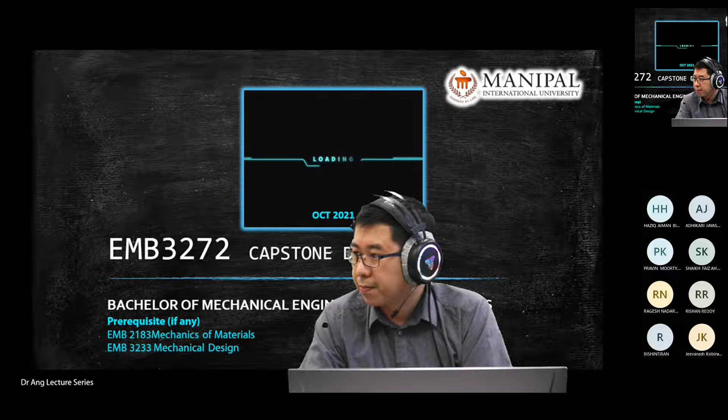All right, now in the previous class I debriefed you on the general information about this Capstone Design 1. Make sure you already passed these two modules, right? You need Mechanics of Materials and Mechanical Design. Just to recap, Capstone Design 1

will continue in the next semester as Capstone Design 2. At this stage, we're focusing on your design. You come up with a design by end of the semester, and then you materialize it or fabricate it in Capstone Design 2.

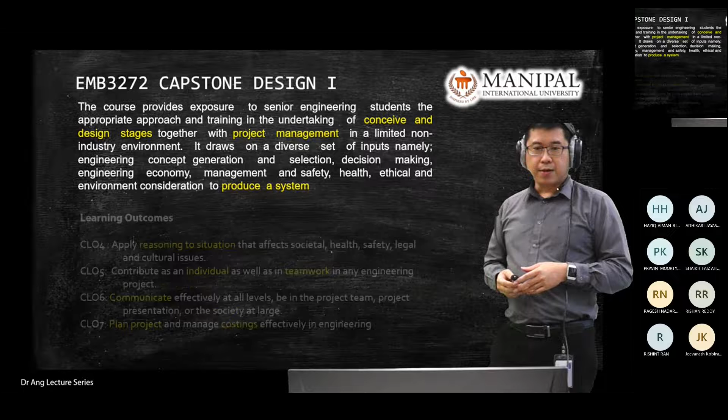Now I will give you a topic for this module. You have 100% coursework, with individual presentation, group presentation, and so on. You have a project report, and by the end of the semester you need to submit a report worth 40%.

What I'm trying to do here is break this 40% into phases. For example, first week you submit one part, second week a separate document, so you don't need to rush for the final report at the end of week 13 or 14.

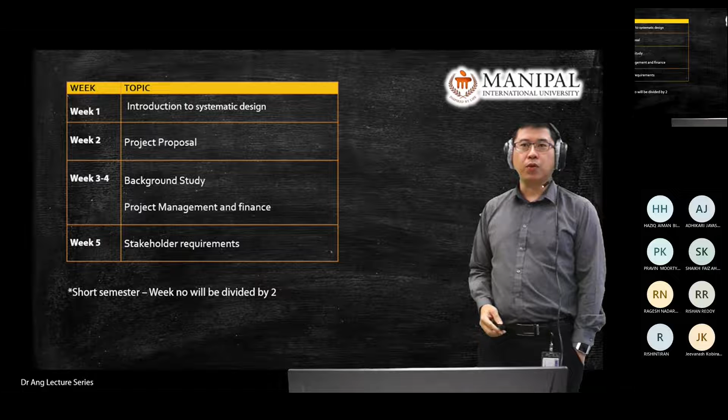I'll give you some idea for the project proposal after the holiday, and then you can start generating your design. Since we'll be doing it in a group, I will group a maximum of 2 persons in one group.

Not me, but you choose your partner. 2 persons in one group. Then we see how it goes - if we have an odd number, then maybe I will allow 3 maximum. It depends on the situation we have.

Once our class stabilizes, for the moment try to find one partner for this module. You need 2 individuals in one group for the projects.

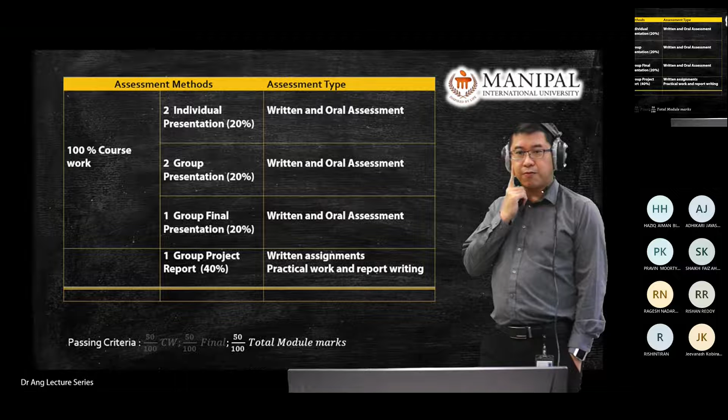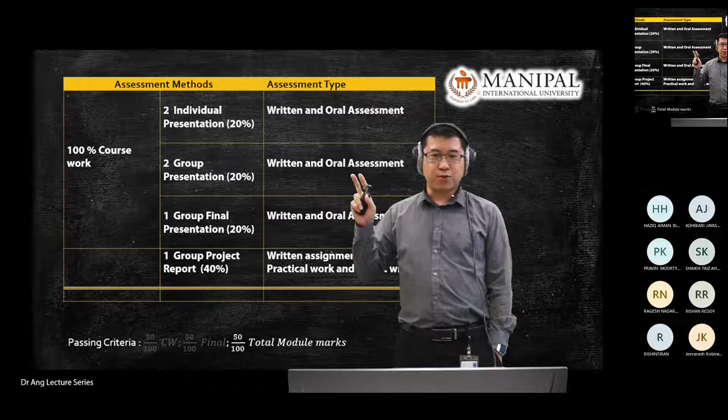I will give you time, and you can start thinking of some idea. You can discuss with your partner, and again, your partner is going to stay along with you together into Capstone 2. So choose your partner carefully - 2 persons in one group, and the 2 of you will stick together from Capstone 1 into Capstone 2. Choose your partner wisely.

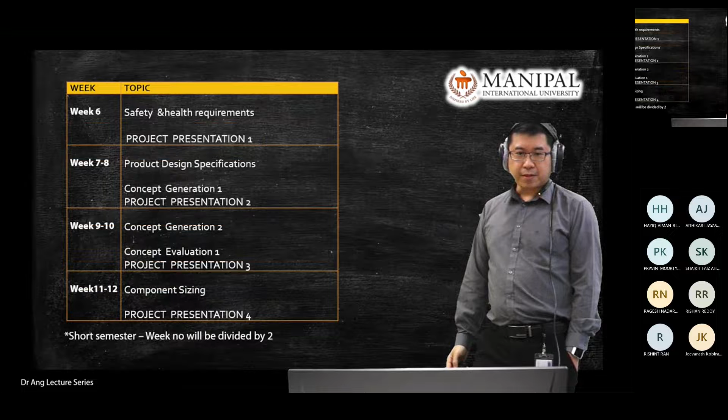Okay, let's do a little bit of lecture today, a short lecture. These are all the references. Don't worry about the PowerPoint slides, I will share with you later.

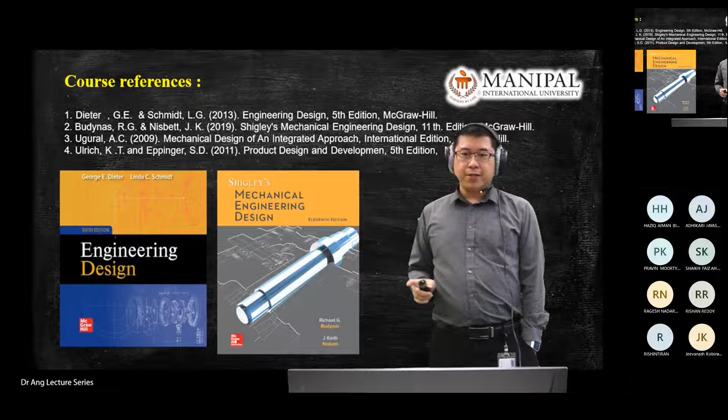So we go into chapter 1: what is a systematic design? I'll be using this book. It's a bit old, but I think published in 2015, 2016, right?

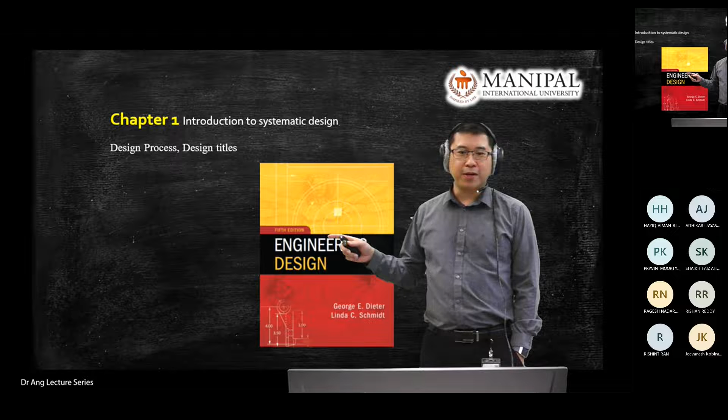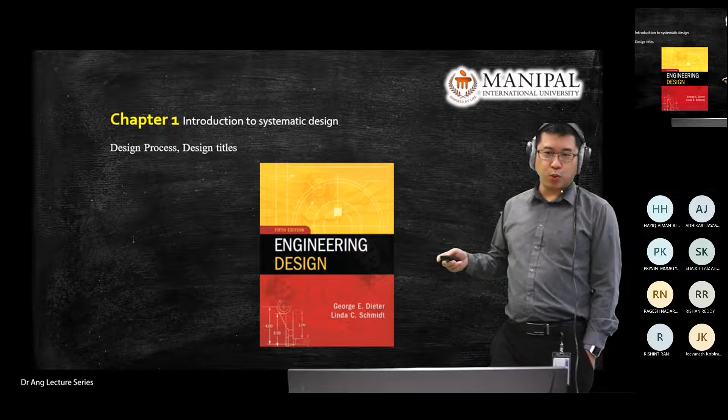The reason I took this book is because of the colorful photos inside. The latest version I have doesn't have color, so it appears less interesting when we talk about the topic. So I chose this older book instead, but if you have a more latest version, feel welcome to use it - it's the same information, only the photos in this version are more colorful.

Both textbooks are by the same author - one is the latest version I have, and this one is the older version, but I prefer the photos inside this book. The concept is still the same inside there.

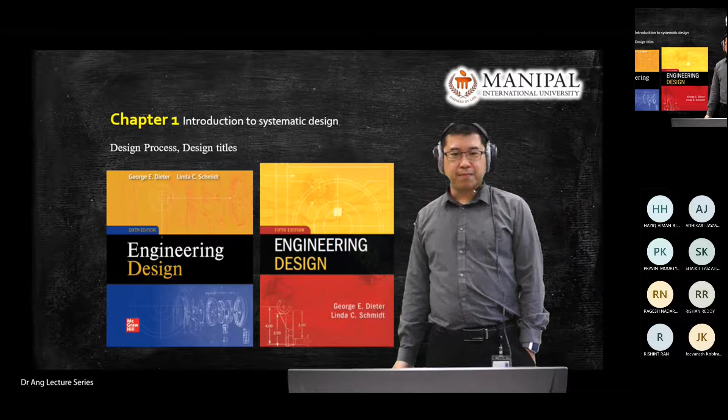So let's look at a few definitions about design. Since we're talking about Capstone Design 1, you're going to focus on design. So what is the definition of design? Design is to put something together, to generate something new - you put all the components together to generate something new, to generate new devices or a new function, or a new way to address the customer need or the society's needs.

So after this lecture, you can go find your friend to become a group member. Then both of you can start discussing about what you want to do in these projects, what you want to design, what machine you want to design. Try to think about that.

Now basically, if you ask me, I would like to propose that in our class, when it comes to Capstone 2, I want to showcase your design and invite you to an international competition. Meaning for Capstone 1, you've spent more time on the design, but when it comes to Capstone 2 next semester, you will still come into my class.

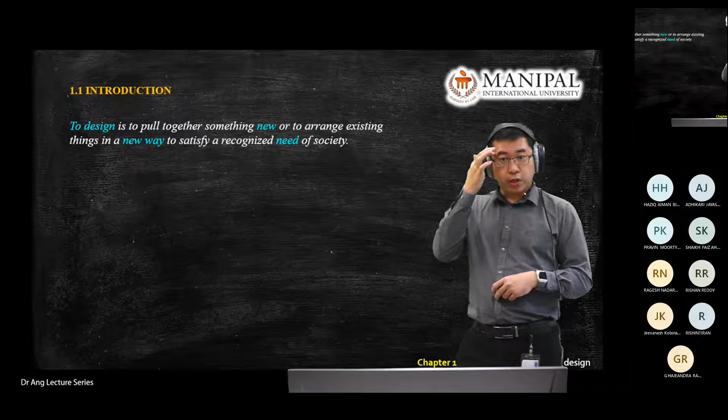Even if your product is so good, it might come out in the news and you might even come out in the magazine. So I would invite you to pay more attention when it comes to your design. Don't cincai. In Malaysia we use the word cincai, meaning you just simply do it for this module.

That kind of attitude doesn't work in this module. So don't give me things that have low quality. I might ask you to redo until you reach a very high quality product.

Even for your products, I will invite maybe top management, VC, or industry experts to come and look at your design. So that is what I plan for our class.

Have that mental preparedness for Capstone Design 1 and even for Capstone Design 2, so that you can see what you need to prepare for the future. So just get prepared for it.

So again, what is design? Design means you use the existing idea, existing component, or existing engineering products, and you assemble them to produce a new function, or a new way or method to satisfy a current society problem.

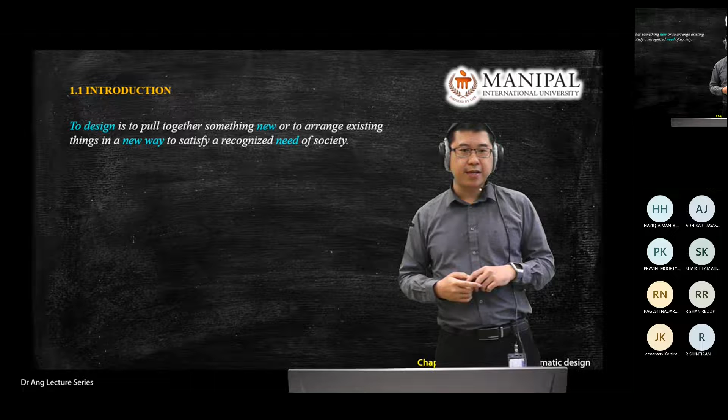I'm still checking the funding for these projects. If there is no funding from the university, however, if your project is related to drone delivery, the funding might come up from my personal account.

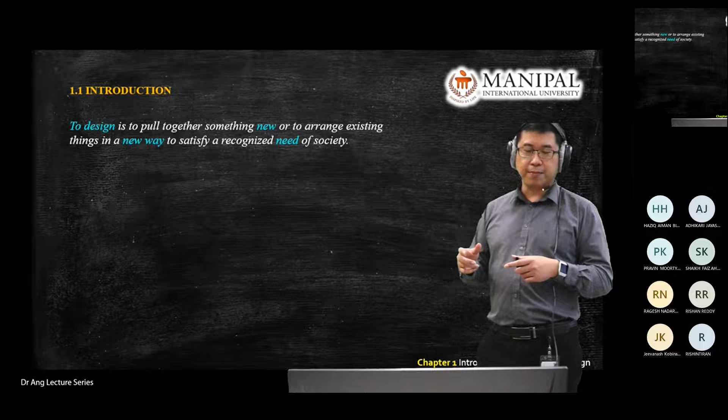So I might fund your idea, or I will invite you to the research group, and we will look at your idea and fund the expenses of, for example, when it comes to Capstone number 2, if your idea was so good and you need to fabricate it, then I will invite you to be part of my research team, and we will fund all the expenses.

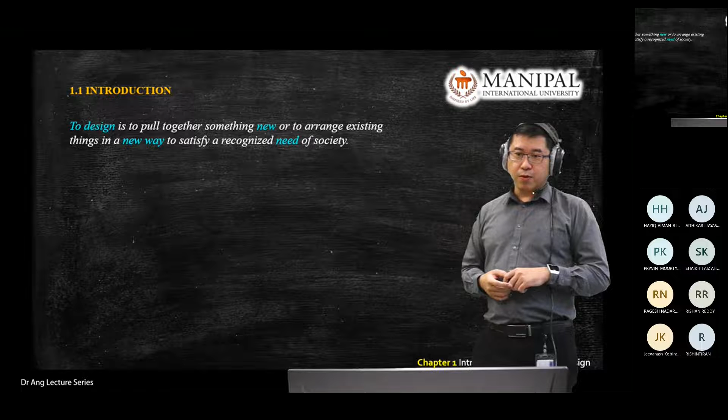When you need to buy things, buy components for the project, the funding will be from me. So that is my proposal, that is my suggestion to you. Of course, for this capstone design, if you have other ideas, I'm still open to you. It depends on the discussion with your partner later on.

By the end of this semester, for this module, you need to come up with a design of your project. And then next semester, when it comes to Capstone number 2, you need to fabricate it and showcase your products.

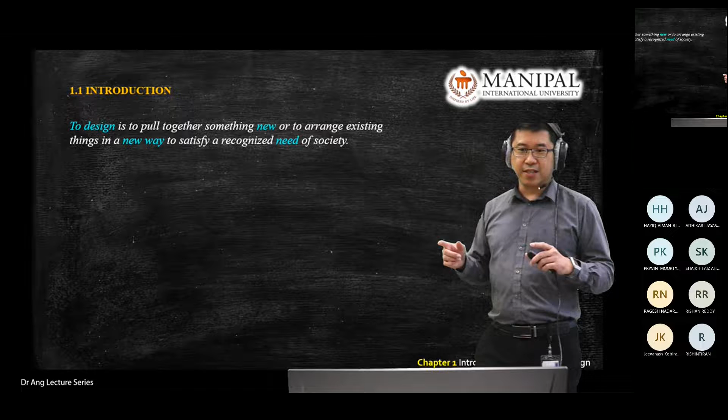And again, I'll bring you to the international competition if your design is so good. So that will be the direction of Capstone 1 and Capstone 2 in my class.

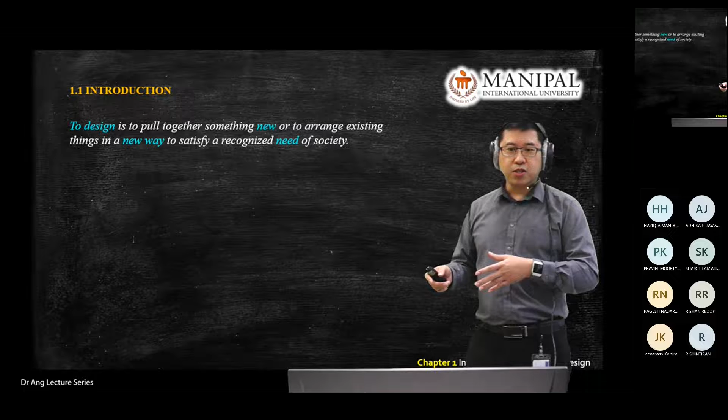In fact, you don't get the opportunity to go into international competition if you compare to other universities' programs. So in my class, I want you to open your eyes to how people do when they come to international competition. In fact, I was invited as a judge in some of the international invention competitions.

So I would like you to experience the same excitement when you can showcase your products to the public in the conference, in the international competition.

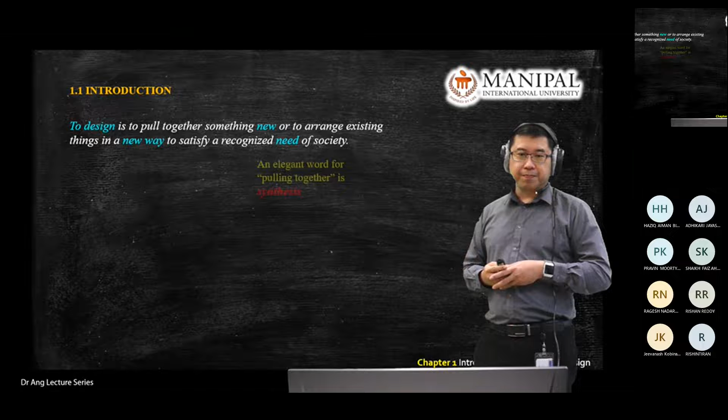One technical word that you will see frequently when it comes to design is synthesis. This word might sound bombastic or advanced or complicated, but when people talk about synthesis, it just means put together. Okay, it just means you put things together.

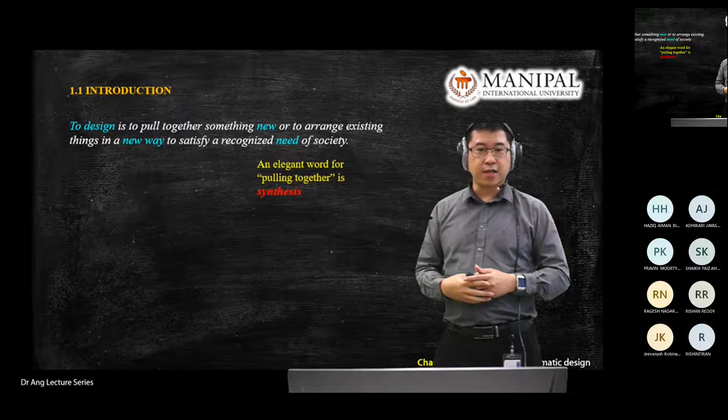You will hear the word synthesis a lot in an international conference where the inventor presents their idea. This is a very popular word they use.

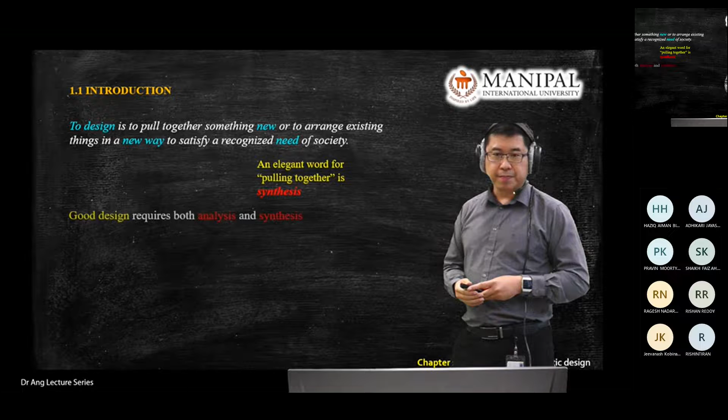What do we mean by good design? How do we evaluate your design by the end of semester? How do you score high marks? It involves two things.

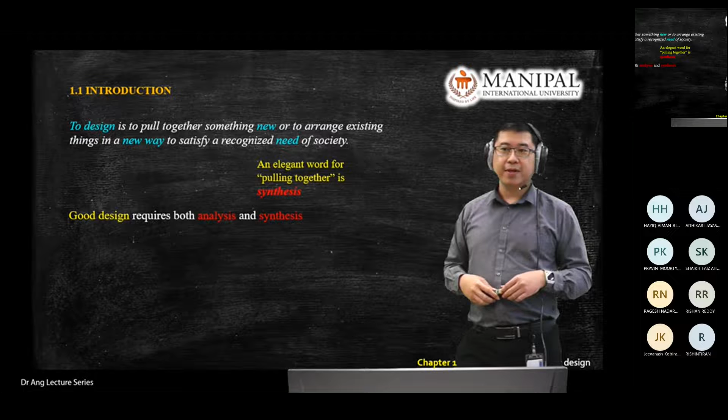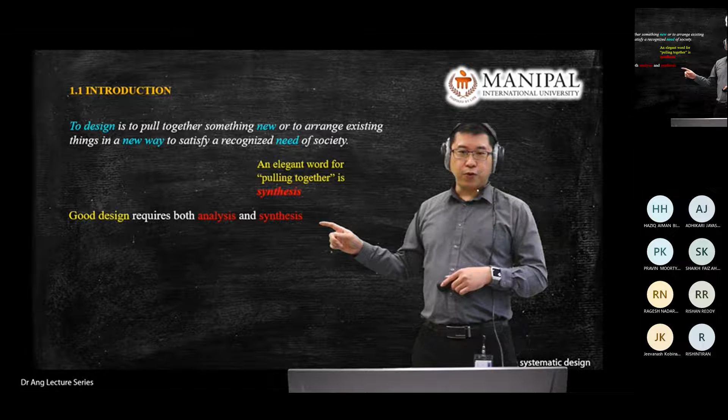One, we look at whether you are using solid engineering concepts or principles to produce the products. Is there any engineering principle or equation that you use for the design? There will be some calculation you need to show us by the end of the semester for your design. Show us what you learn.

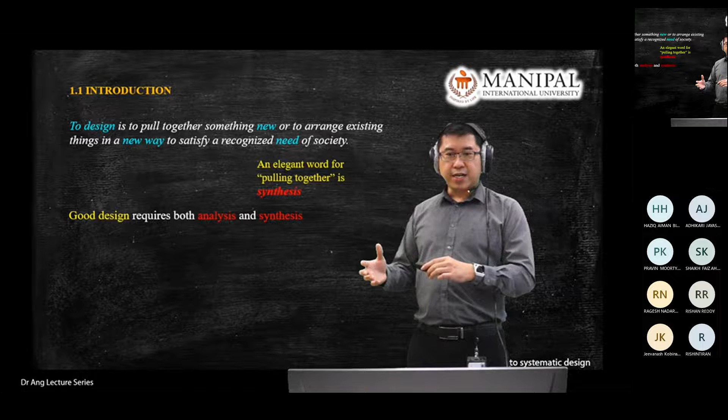Then synthesis means you're able to put things together to generate products that deliver the needs of the customer or the needs of the society.

So this is just a textbook explanation. Analysis means you're able to do analysis, able to predict the behavior. Maybe using equations, you're able to predict the behavior. You learn, I'm not sure whether you learned before, how to calculate the life cycle of products, like the life cycle of a screw - when you have a rotation, how many times it can last if you use this material, and so on.

And then nowadays we have all the modern technology, modern simulations. In Manipal we have AutoCAD, we have CATIA, even SolidWorks, right? So you can use all these tools to do analysis and generate a good report.

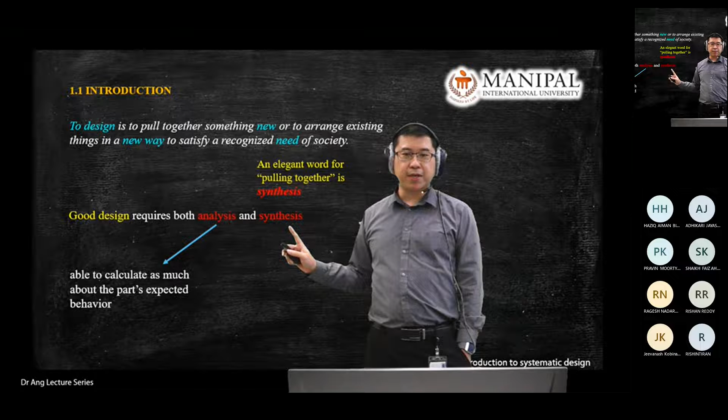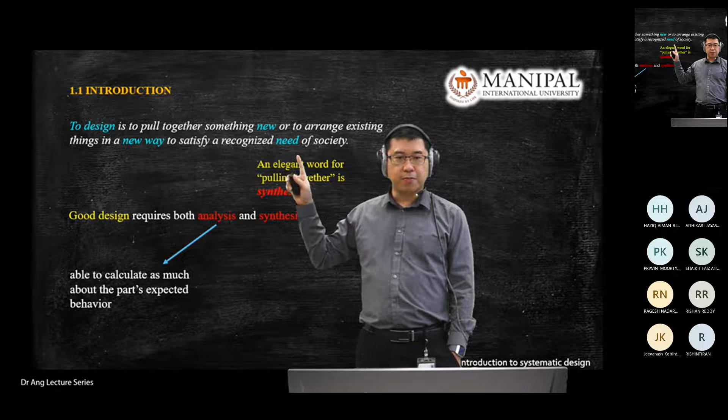Synthesis means you put all the parts together. You learn in your technical drawing that you have exploded view, assembly view, assembly parts and all that. These are the process for a good design. So when you put things together, does it work? Does it meet the objective, or does it meet the needs of the end user? Okay, these are the things.

The first C is creativity. If you want to do design, you cannot run away from creativity, you cannot run away from complexity, you cannot run away from choice, you cannot run away from compromise. So when you do design, it means you do according to the definition just now. What do you mean by design? Design means you put things together to generate a new function or a new idea to meet the needs of your customer or the needs of the society.

So creativity is also related to the word new, where you create something, right? You create something, similar to synthesis, but creativity means you create something new that doesn't exist before. And during the design process, you will come across lots of decisions to make.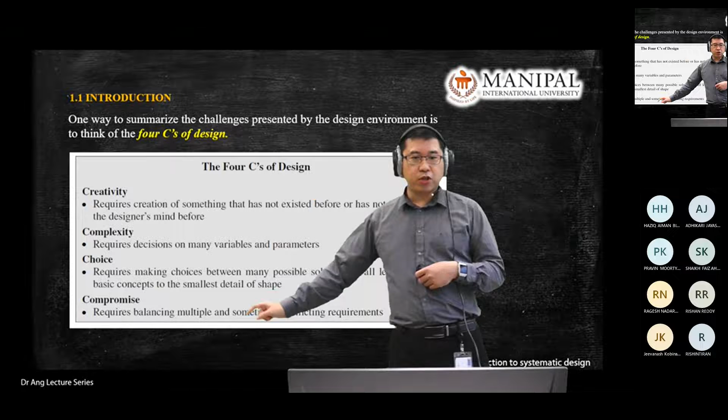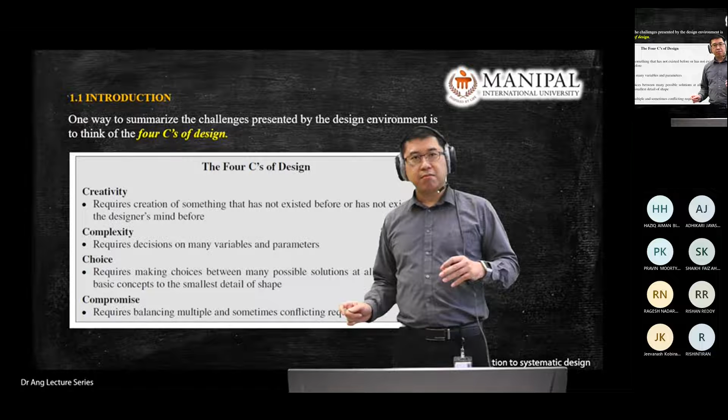So that's summarized under complexity area, and then you have choice. You need to make a choice - for example, in here you need to make a choice. Why do you choose such a shape? Why do you choose a material, and so on? So it involves choice in your design, and sometimes you need to compromise. You need to let go of the luxury of using a high strength material, for example titanium, but you replace it with composite because of the material and the working environment. So sometimes you need to let go of some option, but choose a secondary one.

All right, so these are the things. So 4C: creativity, complexity, choice, and compromise.

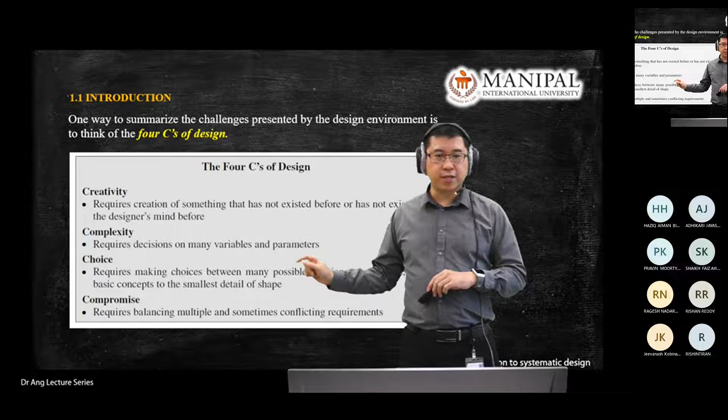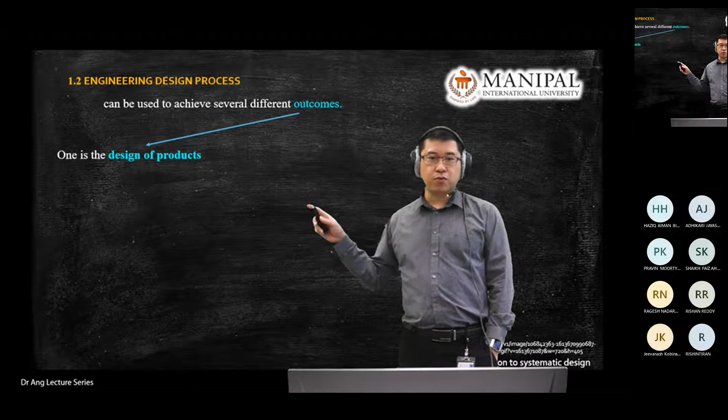Design process, we expect to achieve an outcome. So what are the design process outcomes? One of them is to see the design of the products.

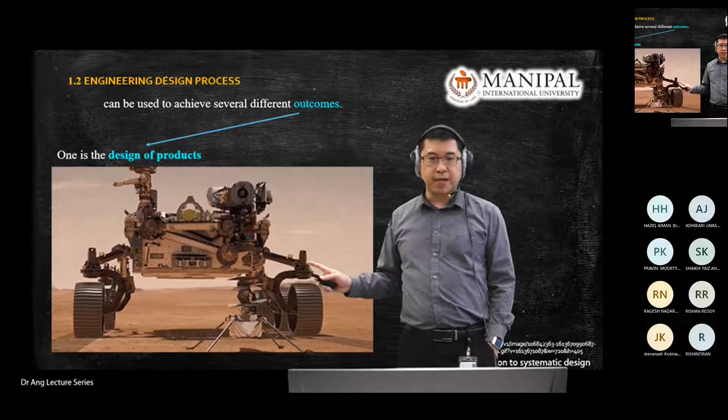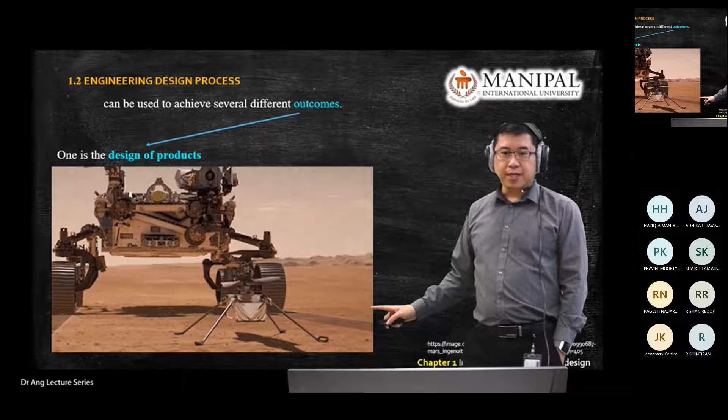So what you see here is the helicopter designed by NASA for Mars. You can see the progress of this Mars helicopter on the NASA website. So this is one example of how we apply the design process.

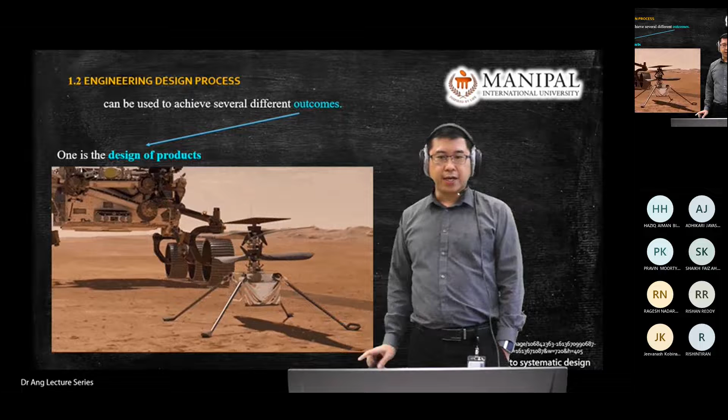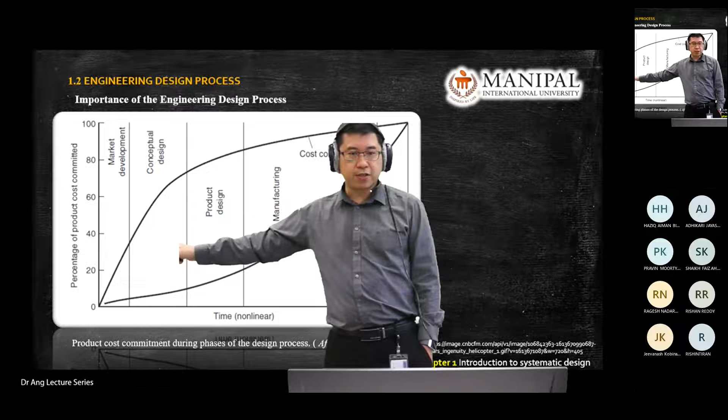So if we apply this chart to Capstone Design 1 and 2, Capstone Design 1 will cover the market development, conceptual design, and product design stages. So the first three phases will be Capstone Design 1, and Capstone Design 2 will overlap product design and the manufacturing stage, but we don't have the product use stage.

This is a showcase where you present your projects by the end of the semester. Make sure your projects, your products or devices that you design, are working.

So Capstone Design 2 will overlap the design and manufacturing stages. Manufacturing means you go to the workshop and fabricate your idea with your partners. Then you showcase and present your products.

So how do you apply or use this chart? Basically this chart is an idea from a researcher, presented after a lot of research. It might look complicated, but as long as you understand the components inside the graph and phases, let me explain what these two curved lines mean to you, and it will help you make decisions in Capstone Design 1.

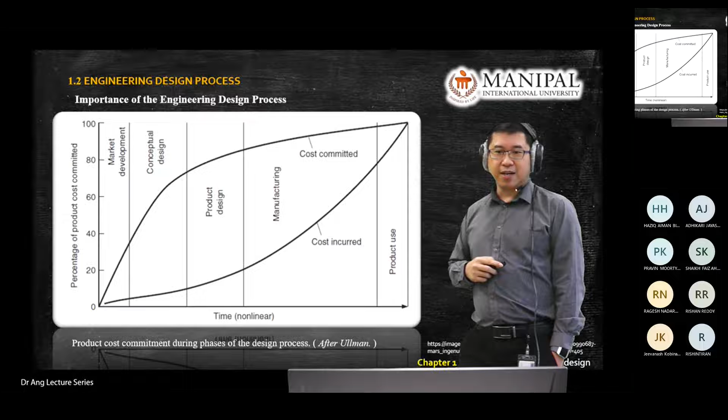Let me mark the first point. Let's say in the market development stage, I mark the first point there and label it A. So let's say you are in the market development stage and you do market research - you survey, you ask customers, you ask end users what they need, and what is the current device's drawback.

For example, I'll use the example of a phone - either iPhone, Oppo, Xiaomi, or other brands. In the early stage when they come up with a new design, let's say I put the iPhone 13 Pro as a product that hasn't launched yet. Before they launch it, they do a market survey - before they come out with the iPhone 13 Pro Max product.

So let's say during the market survey, at point A, they make a mistake or misjudgment. I'll draw an arrow there - you see the bottom arrow, it means this line. It means that the cost the company has to pay is very, very low if the mistake is made in the market development stage. Let's say you make a mistake or misjudgment at point A during the design process - the cost to the company is actually not much, maybe about 5% effect to the company.

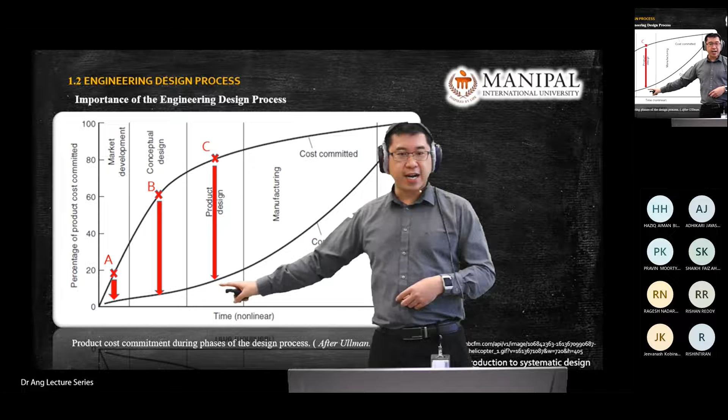What happens if you've already started manufacturing? Now, how does this apply to your program here? Let's say you've already completed Capstone Design 1 and you go into Capstone Design 2, where you need to fabricate the design you spent 14 or 15 weeks on last semester. And you find out that you made one of the major mistakes—you chose the wrong material.

Let's say you're designing a fan, or a drone, or a wing for the drone, or a propeller—something that rotates. You use the wrong material at point D when you do the fabrication. The material was so brittle, or so ductile, that it easily breaks when you try to saw it or cut it. You find that the material is too sensitive to the saw, or to the laser, that you use. Maybe you use laser cutting, and if you use plastic, it melts away when the laser shoots down, because the laser wasn't suitable for that polymer material.

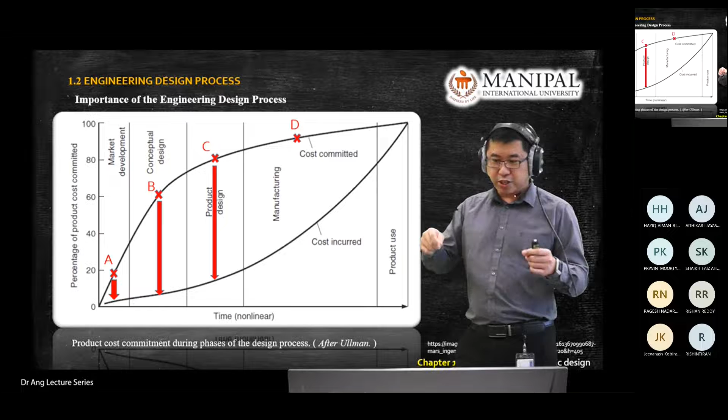So you discover that your design was great and the simulation results were so good, but when it comes to fabrication, you have issues with the tools you use—the tools aren't compatible with, or don't suit, the situation. So every time you use a laser engraver or laser cutter to cut a plastic sheet, you always get melting at the edges, and you don't get the quality you want.

So what happens if you make this mistake at point D? If you project it down, you'll see that the cost you need to pay increases from the previous stage—if you project it all the way, it's about 40%, meaning you need to pay a price much higher compared to the mistakes made before you materialized the design. So you can see the effect.

If you don't have a good design, or you don't follow the proper design process, the cost when it comes to fabrication can be double. Right? From here you can see it's about 15%, but here it's about 30%. It's about double the cost that you need to reverse the design, or redesign the products.

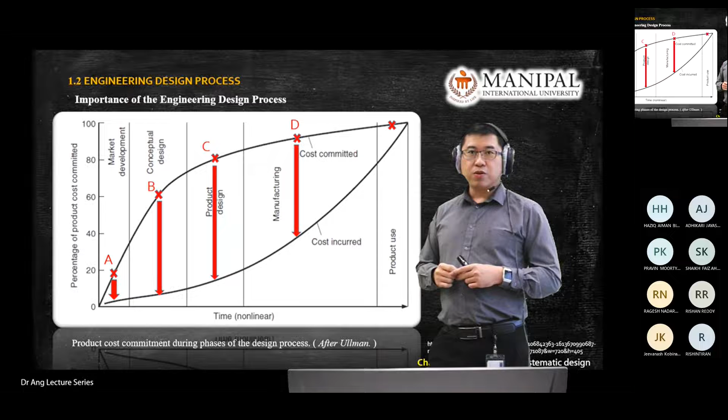So keep in mind, when you come to Capstone Design 1, when you start designing, think of the end results. When you come to Capstone 2, will I face this kind of problem or not? Will the material that I use cause this problem or not? Will the design hurt my finger or the end user, or do you have any sharp edges that will cut away other components inside the design? So you have to think a bit further.

Okay, so this is a reminder in Capstone Design 1. Don't think, 'Oh, in Capstone Design 1 I only need to do a 3D model, or just need to use software, or just need to scratch out a few things.' But think about what happens if your design comes into Capstone Design 2. You will need to pay the price to redesign all the things that you did this semester. So just be careful, right?

The cost jumps even more than that. And then when you come to next semester, you learn a more difficult or more challenging module, and it will be a loading on you. So try to avoid that. Try to avoid that.

What happens if you come to point E? When you fabricate it, you almost want to complete your product already. Almost you want to submit your product for competition, maybe 1 month or 2 weeks before the deadline. Then only you discover this screw that I use doesn't work. It always comes out when I turn on the machine. The screw always comes out, and it always eats away the edges of the device.

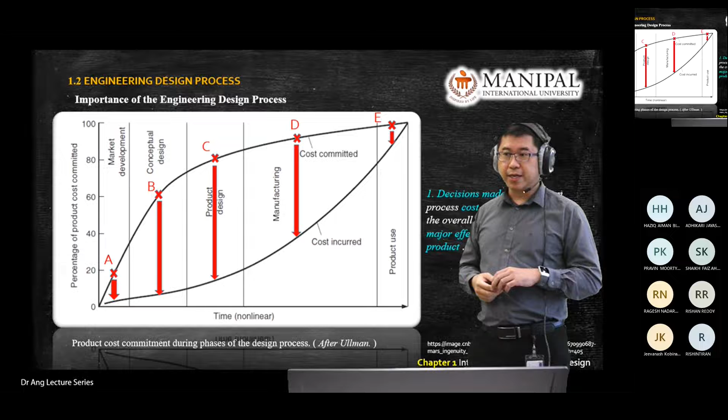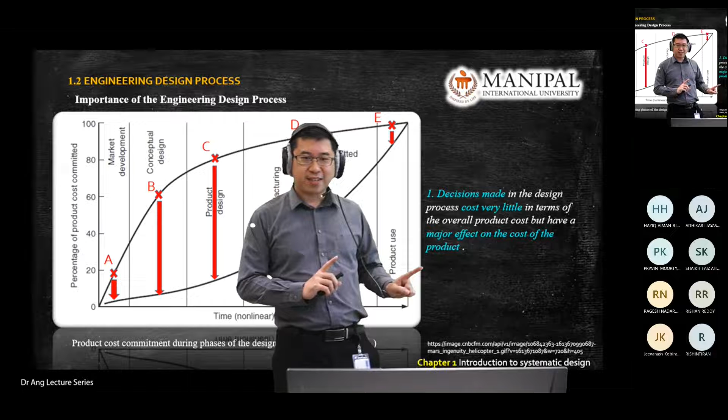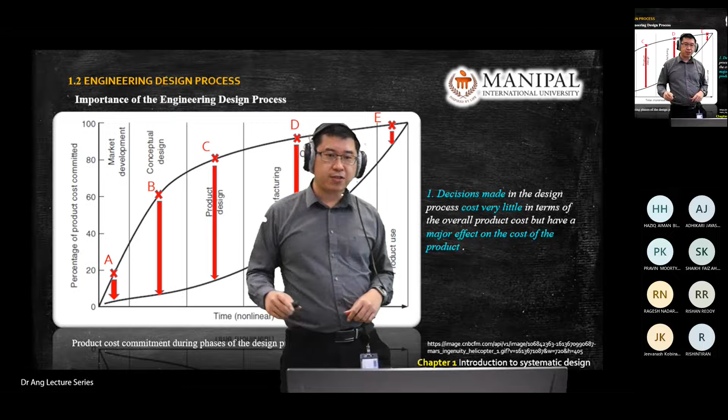So as you can see according to this graph, you just make one point, okay, just one point, so maybe I have to work here. All right, you can see here—sorry, I'm using a green screen, so everything is flipped. So it means that from this graph I explained to you, in the decision stage, although the cost is very little, if you ignore all the mistakes, when it comes to the final product you will have a major effect on the cost. As you can see here, I show you with A, B, C, D, E, and the arrow for all these, and if you project to the left, then you can see the cost that you need to pay if you're not careful enough or not detailed enough.

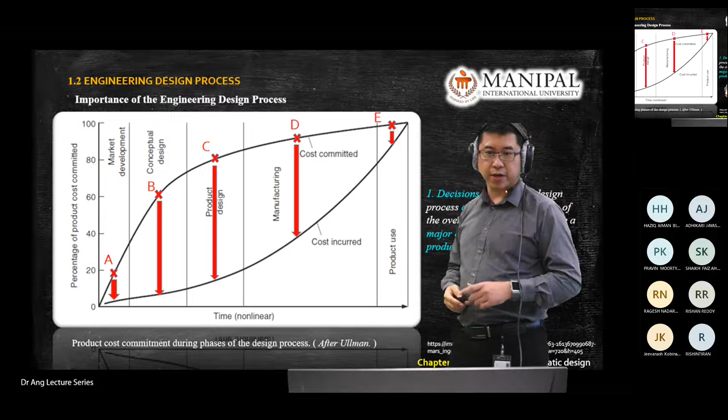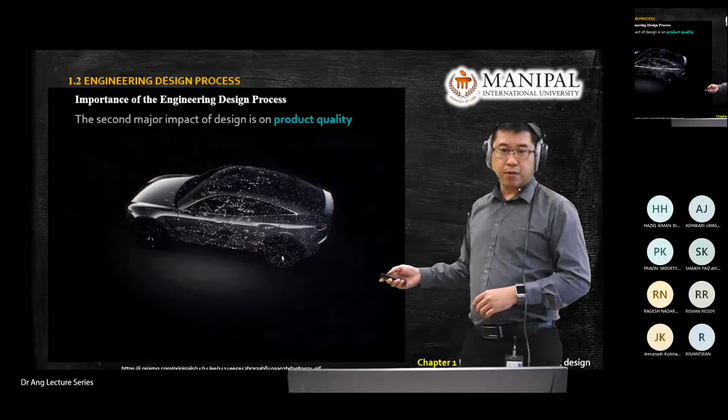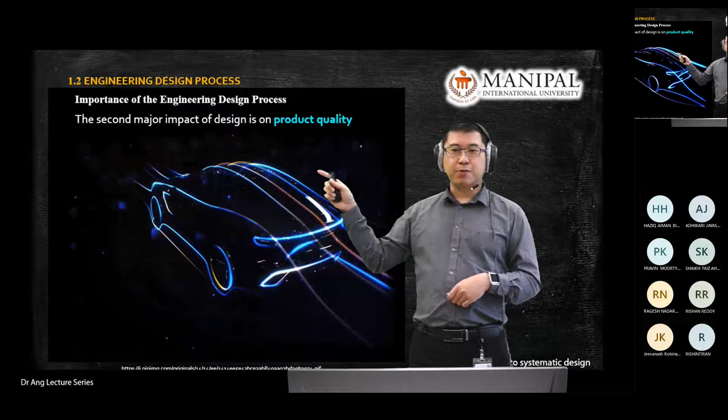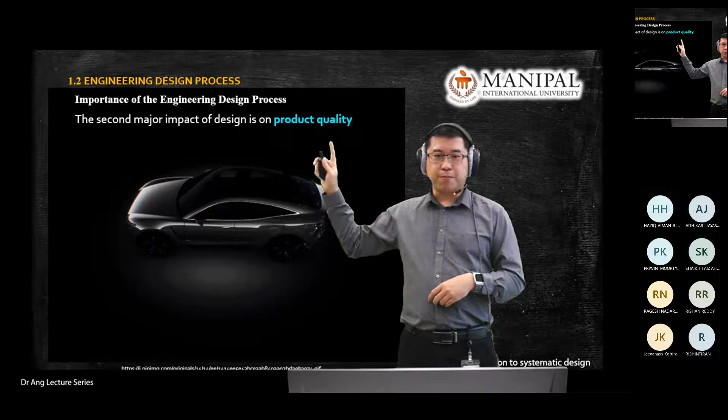All right, another thing about engineering design process will be product quality. So when you design the process, why is the design process so important? Because the design process will determine or decide the product quality. So from Capstone Design 1, we can already see when it comes to Capstone Design 2, will you win the competition or not? Will you get a gold, silver, or bronze medal for your products? So design process decides your product quality.

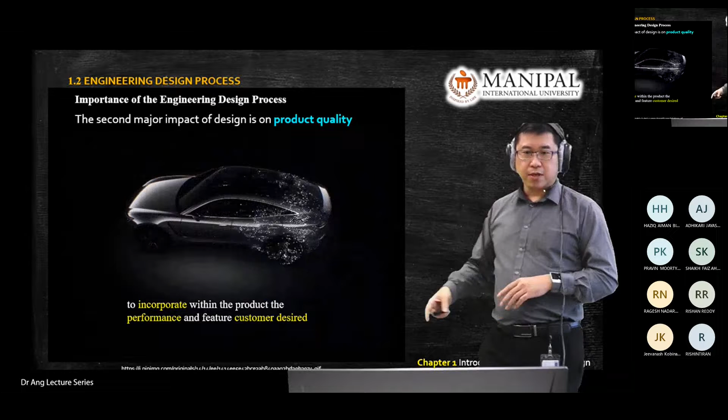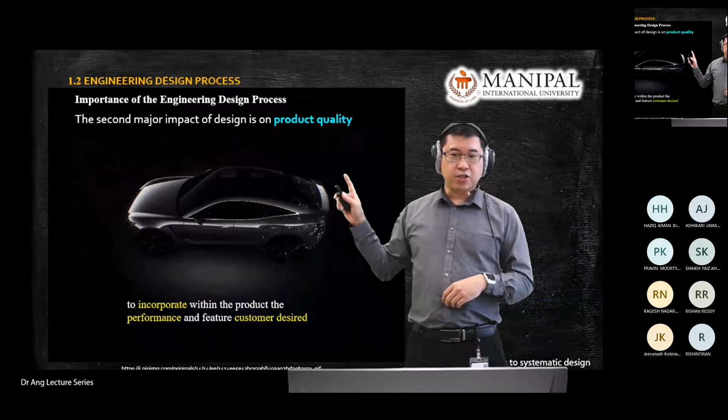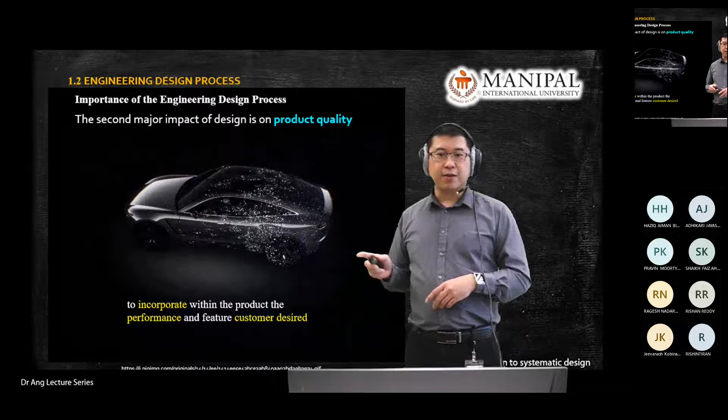All right, so here you see the design of an automotive. The design engineers are actually the critical part when it comes to automotive fabrication or production. When they come up with the design, they actually pay a high salary to the product design department, because the product design department will decide the quality that will come out in the mass production later on. Okay, all right.

Again, I want to stress, when you design something, always cross-check that your design is meeting the customer requirement.

The next area of design process is more on the product cycle time. What is product cycle time? This word might be new to some of you.

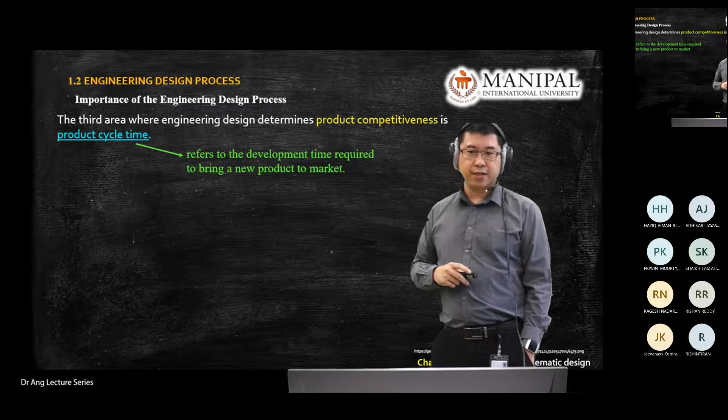Product cycle time, in terms of management and production, means from the day you start developing the idea until the time you reach the market. It means from the day you discuss the idea with your friend until the day you fabricate the products. For Capstone 1, it's the first day you find your partner and start discussing, until the day you submit your report for the idea. So that is product cycle time.

But according to the industry, if you work in industry or do an industry attachment later on, product cycle time is from the development time until you launch into the market.

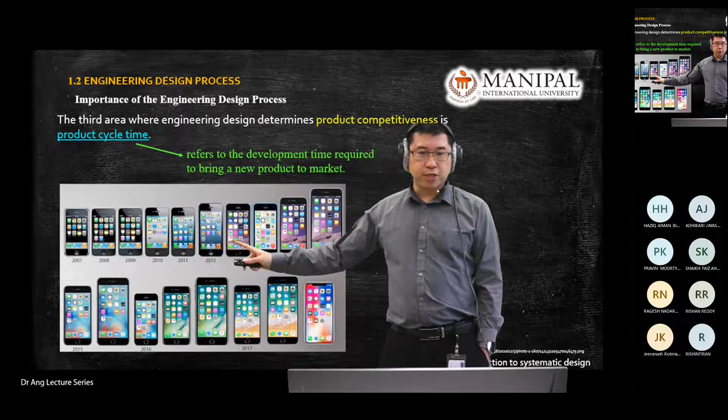This is an example of iPhone or Apple products. As you can see, from 2007 onward, almost every year they launch a new model. This is how they stay in the market.

That brings us to the summary of why the engineering design process is so important. When we talk about design process, we focus on quality and cost competitiveness, meaning keeping low cost but high quality, and fabricating or launching it to the market in the shortest time.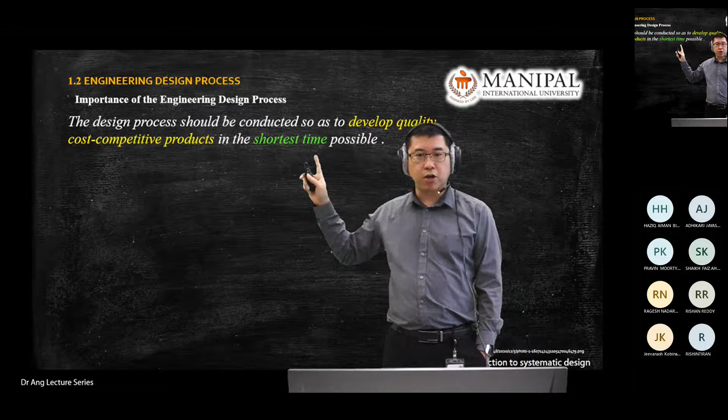This was shown in the picture just now. This is one example of why Apple can be one of the players in the mobile devices market. You can see almost every year they launch a new model, and the model they launch actually shows quality.

Cost competitiveness is subject to the strength of your pocket money, but those who support these products know that the cost they pay is for high quality products, and they know their products can last longer. If you're an Apple products fan, you know that even though you buy the iPhone 13 Pro Max, deep inside you know they're going to launch another model maybe next year.

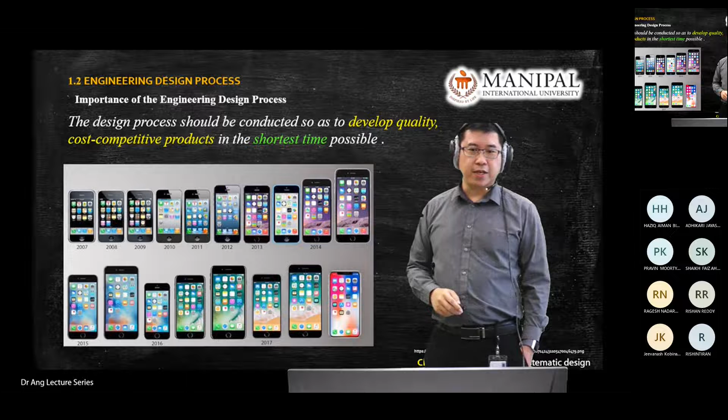So this is how you capture the market. This is how the design process will decide on the product itself. Let's go for two more slides and we'll stop for the day. So, types of design: there are three types, and I will go through them quickly.

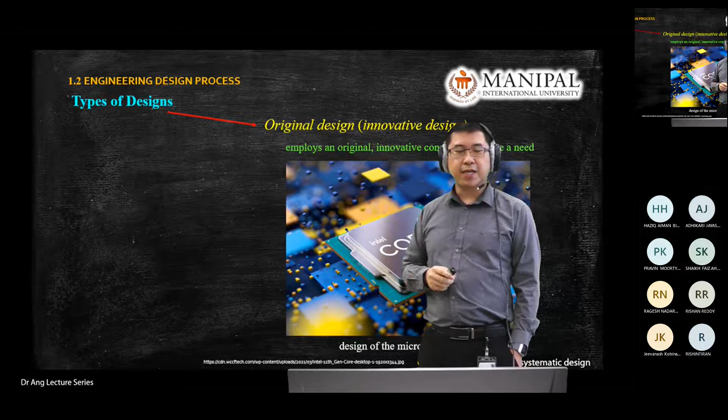The first type of design is original design, also called innovative design. Innovative means something new, something people have never done before. A good example is the Intel chip core, or Intel microchip, a microprocessor.

If you're in the gaming industry and play games, like your lecturer, you know that the graphic card, memory, or motherboard you use needs to be upgraded almost every year if you want to play high definition or heavy graphic loaded games, because you need a good processor. So original design in the design process, one example is the chip — it means you are looking at an original and new concept.

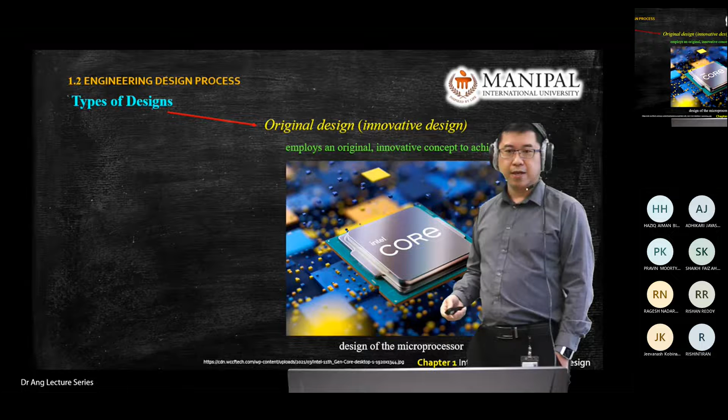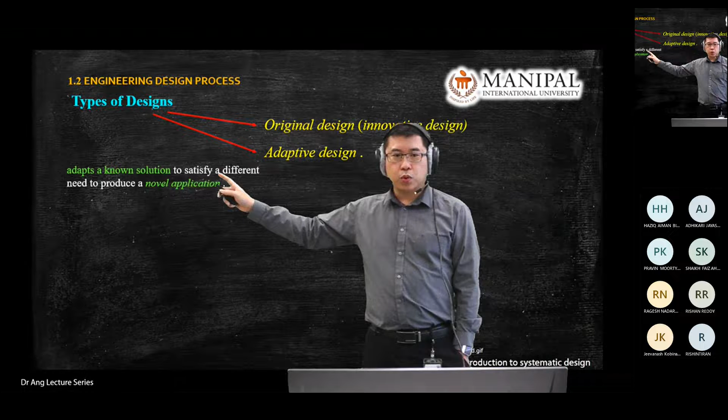The second type of design is adaptive. Adaptive means you use an available solution and produce a new application.

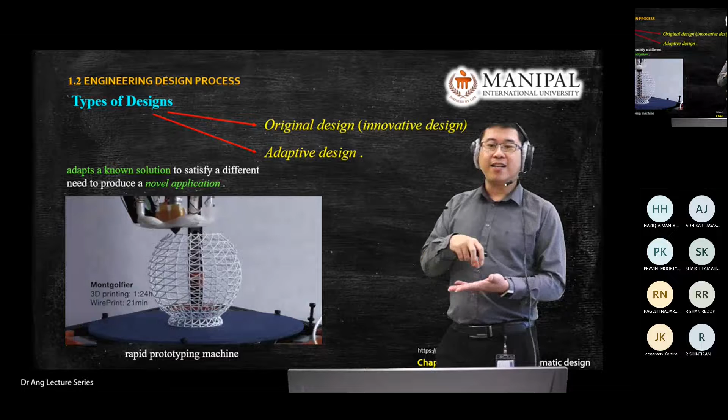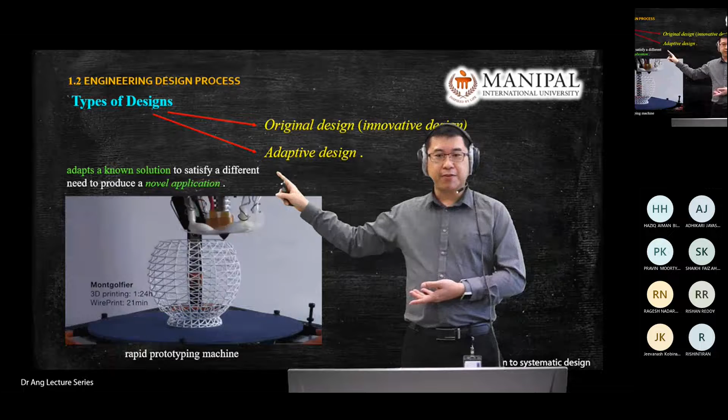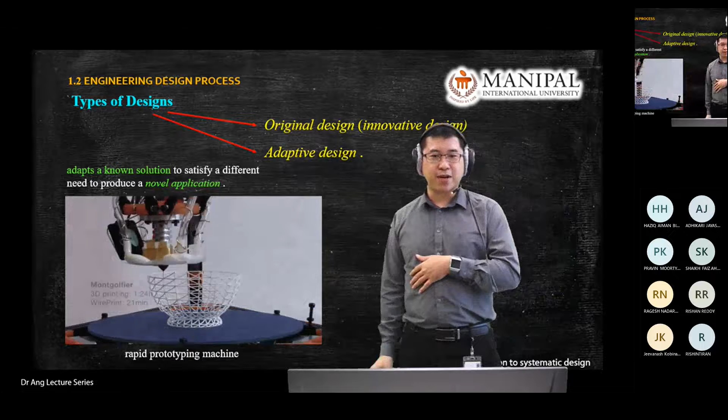For example, this rapid prototyping machine: the idea to do 3D printing or rapid prototyping uses the concept of an inkjet printer, like the Canon inkjet printer you use to print A4 paper or your coursework. They use the same concept to produce a 3D machine. This kind of design falls under adaptive design, meaning you use a concept from another area to create a new machine that meets the customer requirement.

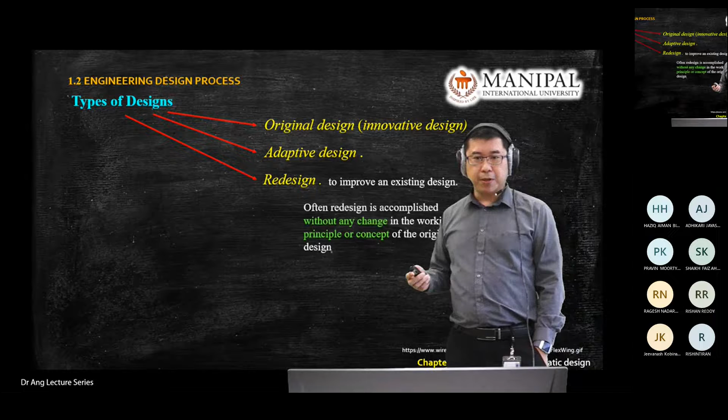The third one is redesign. Redesign means you just improve the existing design. An example is research done by NASA, where they redesigned the wing using a morphing mechanism.

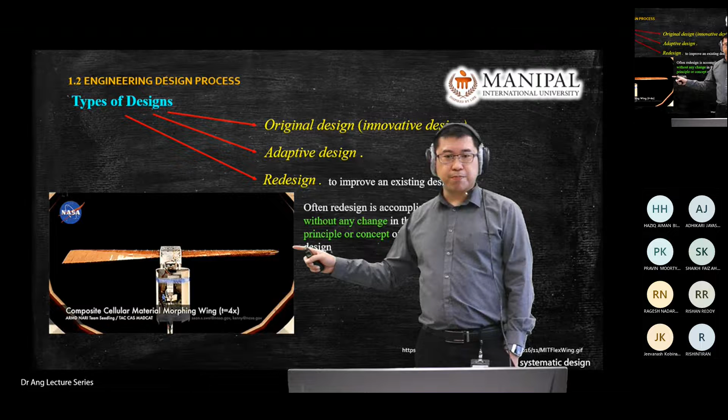So what is meant by redesign? This is the textbook definition: redesign doesn't change anything in the principle, meaning the equations or principles used for the design — for example the wing, you have all the existing design and equations to design a wing. However, you change a little bit in the mechanism, such as this morphing wing, where you change the mechanism inside to change the profile of the wing. So this falls under the redesign type of design.